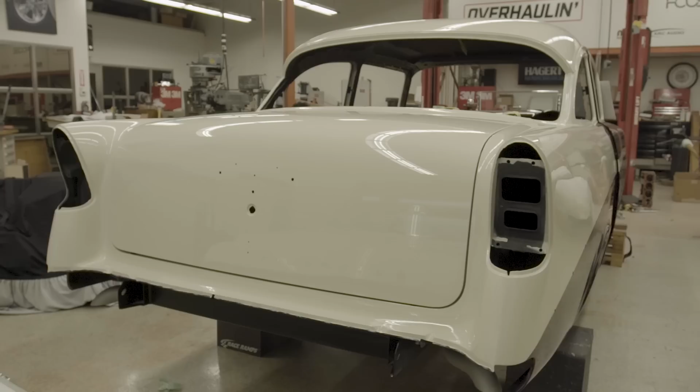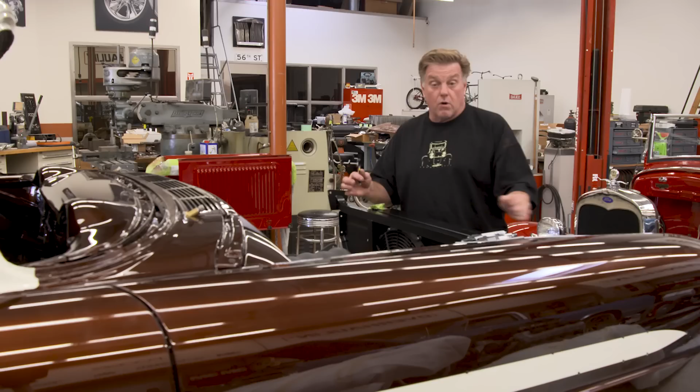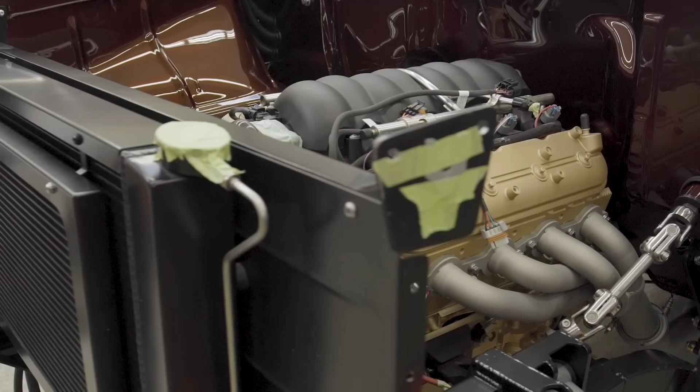Well, as you can see, we've got Ron Lund's 56 Chevy painted now, and we've put the body back on the chassis, and we're starting to assemble the car. But one of the things I have to do is finish the engine and build a cover over some of the parts here. So I'm gonna go ahead and sketch what I think I'm gonna end up building and get the ideas before we start building, and start putting together what everything is going to be on here now.

As you can see, we painted the block and we've got some polished parts. I have already pulled the throttle body off. We're gonna send that out and get that polished. We'll have to build a tube that feeds that, probably end up coming through over here, and we'll have an air filter that's out front that feeds the engine, kind of like a ram air system where cool air is actually going into the motor.

We're not gonna pull the motor air after it goes through the radiator. We'll pull it out in front. So in essence, what we're gonna have is a ram air system, because we're pulling cool air in front of the radiator to feed the motor rather than bringing in air that's gone through the radiator and preheated before it goes into the motor. It's ram air, it's cool air, it's better performance.

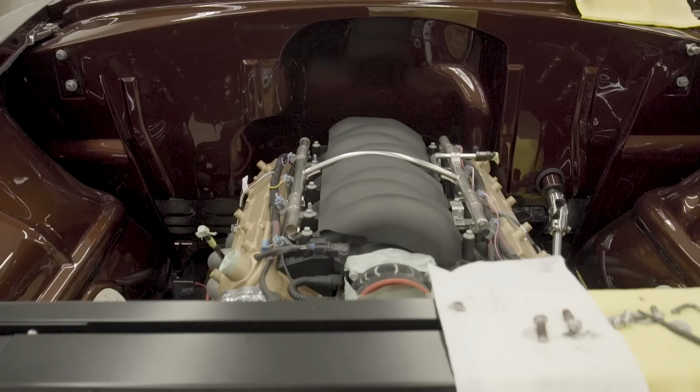The other thing is I'm waiting for the valve covers. Mike Curtis is building a new set of valve covers, so I'm gonna sketch what the valve covers will look like on this rough sketch. And then it's just the pieces that I've got to make that go over the fuel rails. That's what I'm gonna be sketching, what we have to build out of sheet metal, paint it, stripe it, put an emblem on it, whatever we're gonna end up doing. This is going to be the idea for that.

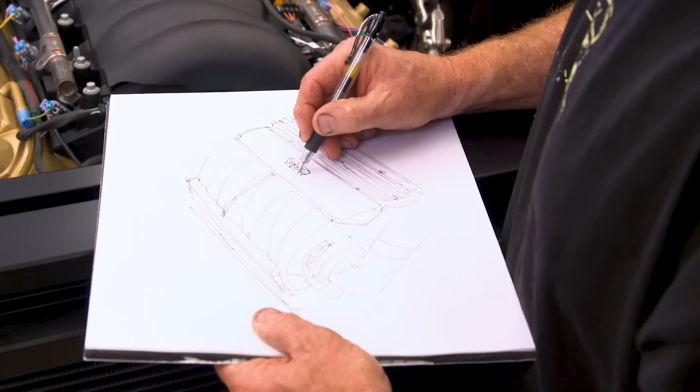Might be cool to run the Bel Air logo in the center of that piece that's going to fit right on there. Throw a little bit of color on this, or I should say gray tones.

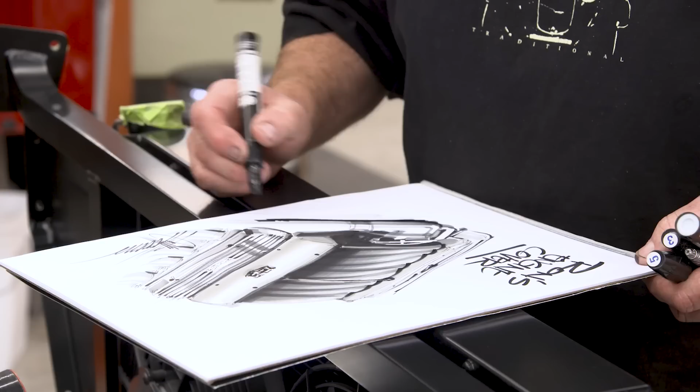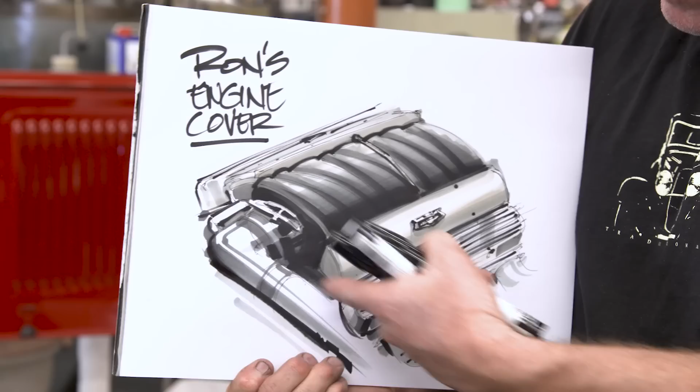So when it's all finished, I'll have Mike Curtis's valve covers bolted on. This is the original plenum that feeds the motor with air, but I'll have that tube that's feeding it. These are the two pieces that I need to build. And what I want to do is make those out of sheet metal, and they'll bolt on.

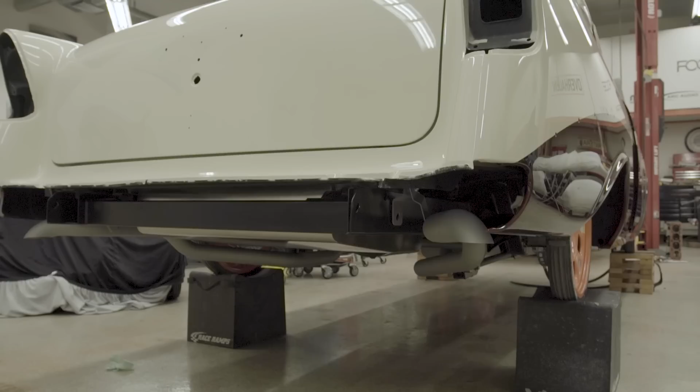And when I'm finished, I want to paint these the same color as the roof, that cream color. And then I'll end up using a Bel Air logo that I'll put in the very center. And it'll finish this off, and you're not looking at all the wires for the injectors and the fuel rails there. That'll cover it up, it'll look beautiful.

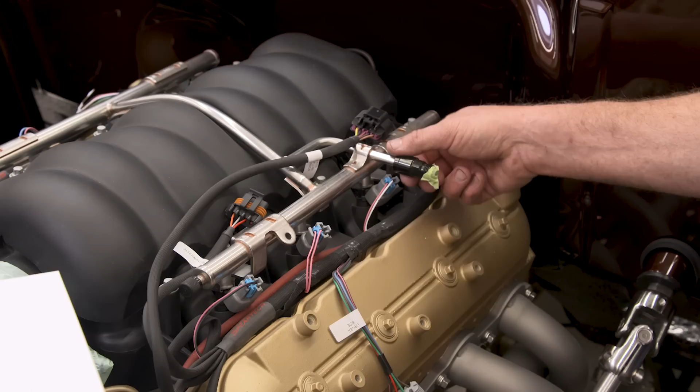You see this feed line for the fuel rail. This would have a tube that comes directly in here, and the cover that we're gonna build will end up being right in this section. Well, you see I didn't draw it because I'm gonna have a logo right there. I don't want it to be real busy looking. So what we'll end up doing is I'll bend this in here, and we'll feed the fuel rail from the back. It'll come in from back here. This will stay real clean.